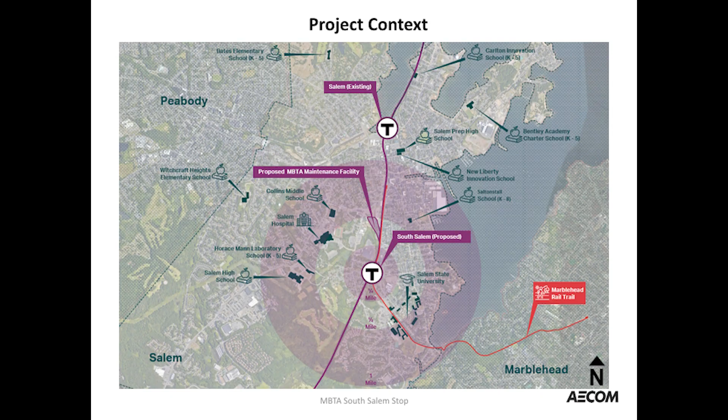Getting into the site constraints as to why the station is laid out where we're proposing, we have the Jefferson Ave Bridge going up and over the tracks to the south. We have the tunnel further north, as well as the existing MBTA rail yard adjacent to the Amazon facility. There are currently 3 tracks in this area: one is just a siding to access the yard, and then there's the 2 mainline tracks.

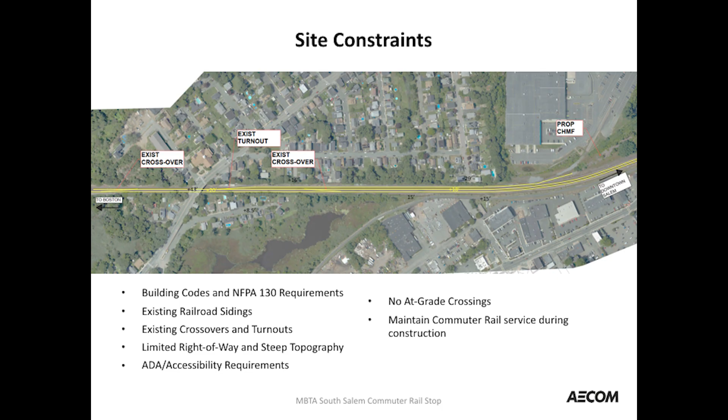So now to revisit what the initial concept was back in June.

The initial concept was to provide pedestrian access via a bridge directly at the end of Ocean Ave West and having 2 elevators for accessibility on each side. Two 600-foot long platforms on each side of the tracks for inbound and outbound access would be accessed from the bike path and from the pedestrian bridge up and over to each side of the platform.

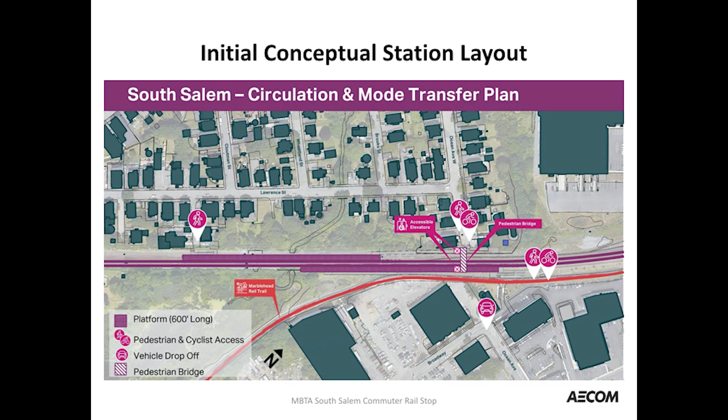Quick 3D view of what was proposed back in June. A view from Ocean Ave West of what was proposed in June.

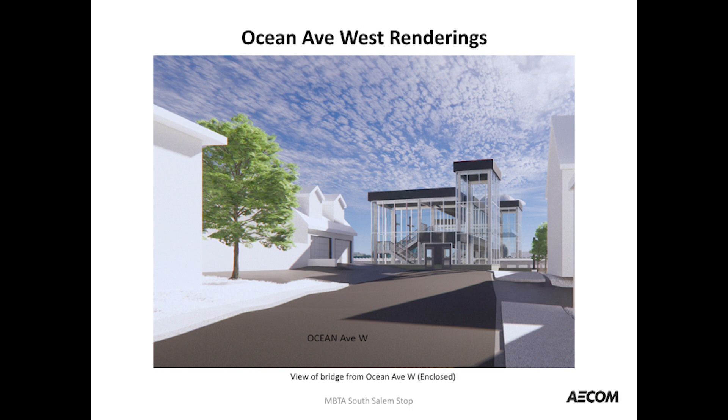Getting into the feedback that we received both in person and via the SurveyMonkey, a lot of the positive feedback that we received from over 100 survey responses was public transit improvements, environmental positives, reduction of traffic and vehicle emissions in the city, accessibility and connectivity of the neighborhoods, and easier access for students to Salem State.

The main concerns that we received from the public include vehicular access and traffic concerns along Ocean Ave West, pedestrian volumes on Ocean Ave West to access the station, noise and disruptions to the neighborhood from the station, parking along local streets, light pollution and visual impacts to those living on Ocean Ave West, and general safety concerns.

Now moving on to what the project team has been working on over the last few months to address the public's comments and feedback. The new updated baseline is shifting the bridge and major infrastructure further north, away from the end of Ocean Ave West and the direct view of the neighborhood.

It's the same distance to walk. There's just a switchback that has been eliminated from the ramp, so accessibility and distance for someone to travel up and over the tracks remains the same.

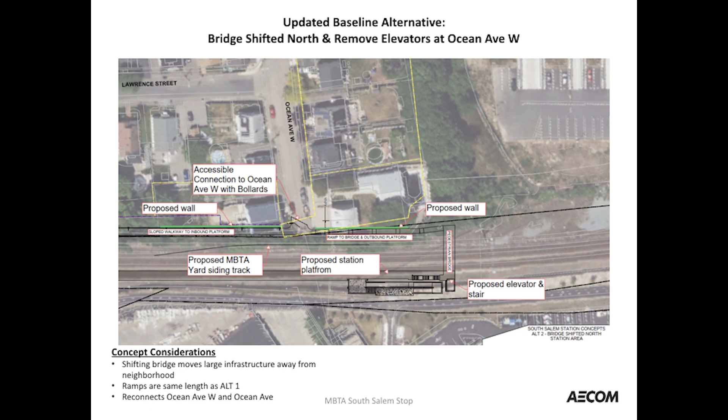As was noted, elevators are being removed from the western side of the station. It would just be a ramp, and the bridge would now be behind the Ocean Ave West neighborhood. Everything on the bike path and Canal Street side mostly remains the same, with the bridge shifted north and an elevator and stair system proposed to get accessibly down to the bike path elevation.

Here's a 3D rendering of what the concept would look like for the new baseline alternative with the bridge shifted north. Here you can see ramp and stairs covered by a roof, as well as the pedestrian bridge elevator structure to the right, and your platform canopy, both 600 feet long on each side of the tracks.

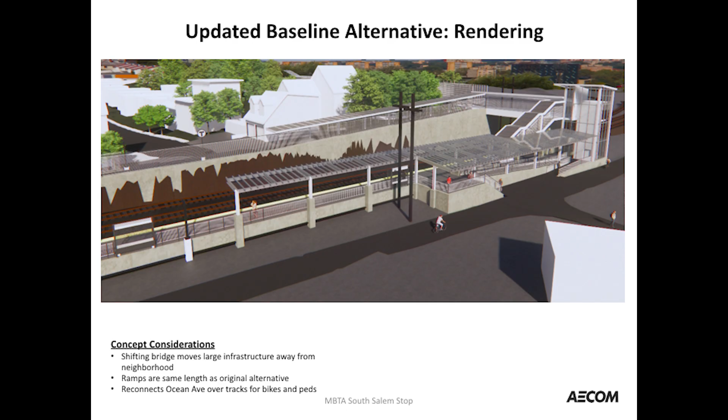Here's an updated rendering view of what it would look like from the Ocean Ave West neighborhood. Here you see the tall railing fence where the existing retaining wall is to protect users, and then there's going to be 2 ramps on either side with the MBTA lollipop sign to access the station.

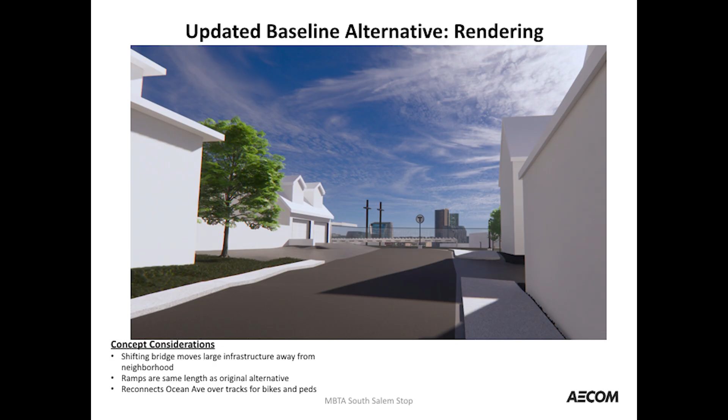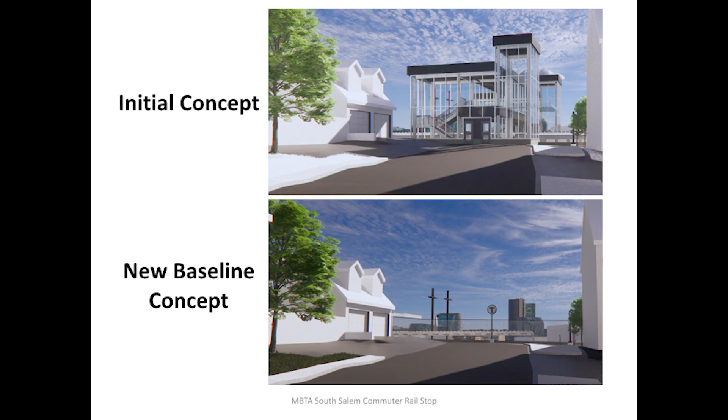Now, in addition to what we have done with the initial baseline concept, we've taken the feedback from the public a little bit further to see how we could possibly mitigate the impacts to the adjacent neighborhood of Ocean Ave West and Lawrence Street. With this, we thought about how we could completely mitigate the large traffic volumes, both by vehicles, bicycles, and pedestrians along Ocean Ave West.

The thinking of this new alternative is having an alternative access point along the Amazon site, getting to Jefferson Ave via 193 Jefferson Ave. This would be a 14-foot wide path, similar to the existing Salem bike path and other rail trails in the state. It would have lighting, security, trash receptacles, and signage, and could essentially be considered a spur or continuation of the existing Salem bike path.

Here's a zoomed in look at the station area with this additional access. Everything remains the same - we have walls and ramps along the Ocean Ave West side of things. And now at the pedestrian bridge, we have the spur, which is going to continue west up towards Jefferson Ave.

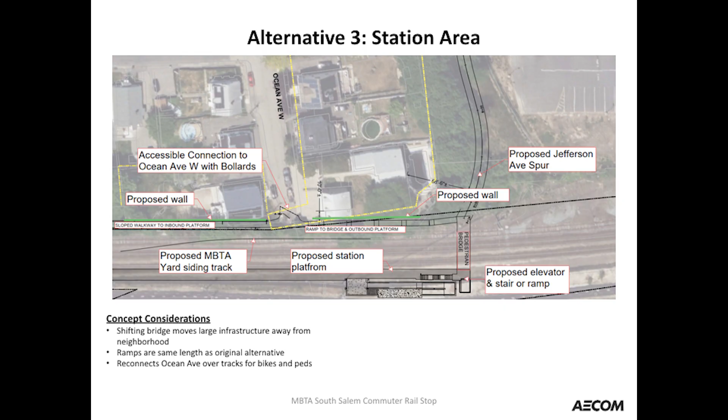Sorry, can I just ask a question - do you have people still coming out on Ocean Ave West, or is there a proposal to bring them north and out by Hampton? Why don't we take questions at the end - we'll address that one if we haven't covered it in the following slides. We'll get to it in the Q&A. Thank you. All right, thank you.

So here's a 3D view of what this would look like from a slightly different angle with the Jefferson Ave spur. You can see both the staggered platforms, the covered ramps, covered stairs, and pedestrian bridge.

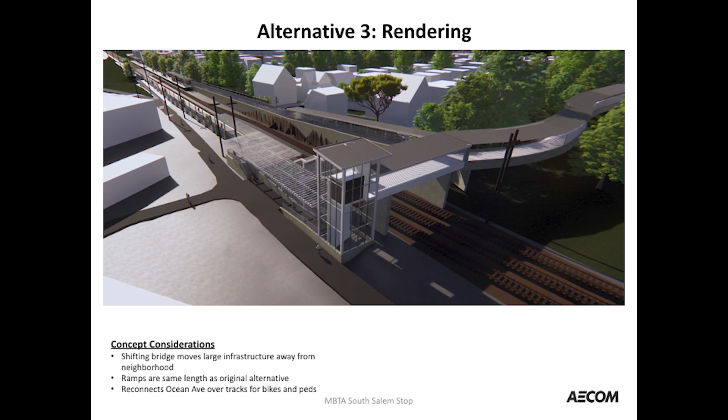Some two critical cross sections to take a look at what we're working with in elevations in this area. At the top of the page, we are about halfway along this Jefferson Ave spur path. To the left in blue is the existing Amazon warehouse building, and to the right is the existing residence property line. As you can tell, that is up in elevation and the path is starting down in the trench.

That will slowly ramp up to the pedestrian bridge, which is now at the bottom of the page, closer to the pedestrian bridge, where we're about even with the backyard elevation of the Ocean Ave West properties. But we are proposing a privacy screening and canopy along the residential side of the path.

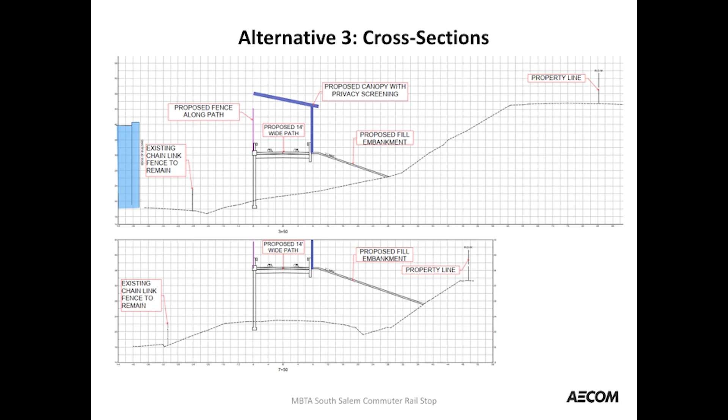Another critical area of this design concept is how do we connect at the end of Jefferson Ave to the city streets and sidewalk. In order to make this fully accessible, there needs to be a ramp, shown in green on the screen, from the existing parking lot elevation. For those familiar, there's a very steep driveway there, so a new ramp system will need to be designed to make it accessible into the sidewalk.

Working with, and thanks to Beth, we've been able to coordinate with the private property owners. They're all willing to work with us, they have their own plans, and we feel comfortable that all parties can get what they want and have a good design moving forward.

At this moment in time, we're proposing for this concept to have a small pickup drop-off island in the back of this parking lot. This could be utilized by private vehicular traffic to pick up and drop off any users at the end of the path, and also for the hospital shuttles, which are currently going around Salem streets to come in and pick up and drop off users for the hospital.

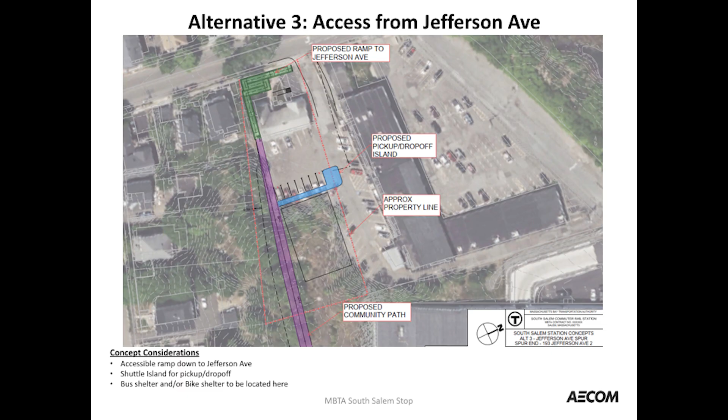Here's a different angle looking west towards the neighborhood and the path, with ramps there and an elevator.

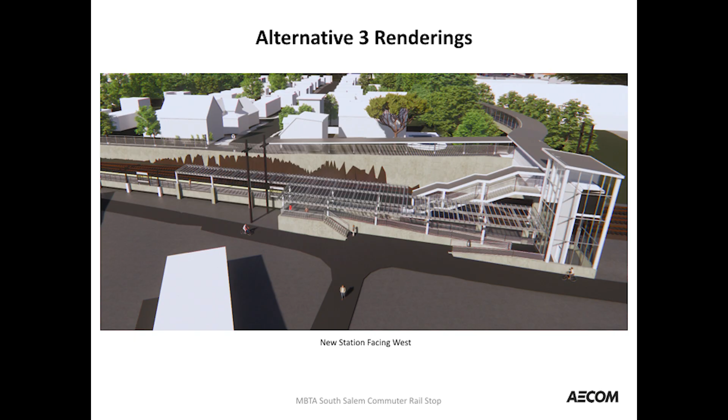Here's a nighttime view of the alternative. This would be the same for the baseline, just without the spur - same lighting for security and visual purposes. With the canopies and walls proposed, this would help mitigate any light pollution spilling into the end of the Ocean Ave West neighborhood.

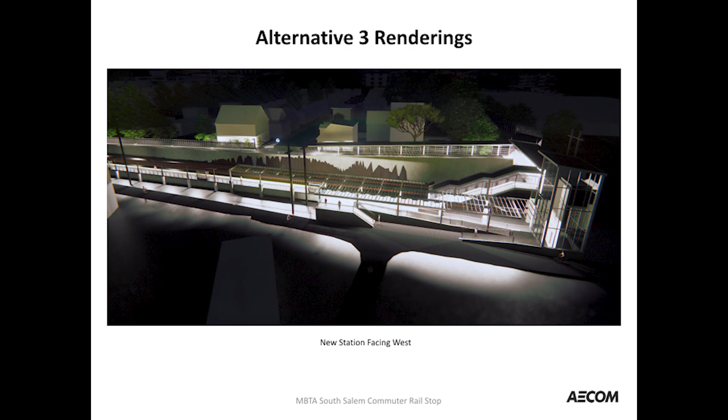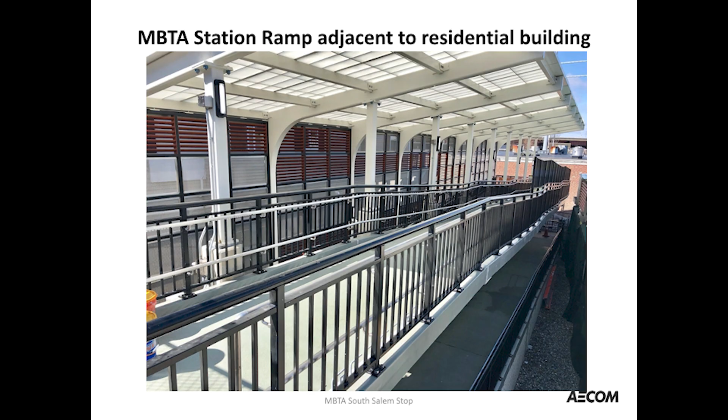Here's another real life example of what is used when building ramp and platform structures directly adjacent to residential neighborhoods. Here's a ramp system accessing an MBTA station, mostly covered canopy, one side wall with screening, both with partially translucent panels and aluminum fins. There's an existing residential building about 8 feet away from the back of that wall, and this wall still allows natural light to both sides, for the users on the ramp and the residential building, but it also provides privacy and protects the residential unit from people looking up into their windows.

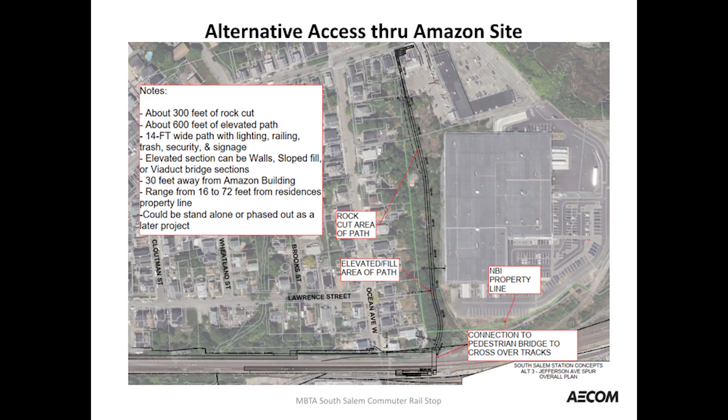I guess we're trying to figure out if that proposed area where they go down Jefferson Ave, is going to be placed, putting them out on Ocean Ave West, because I see no reason why there would need to be access on both sides. The access to Ocean Ave West is required by code regardless, and the idea is to provide access to the neighborhood to get up and over the tracks regardless. This is a neighborhood station, and neighborhood access to the station is— But the neighborhood doesn't want it. We're gonna take one question at a time, okay?

If you have a question, I'll come to you. Thank you, I'm sorry, can I just have one follow-up question? You mentioned you have walls or some sort of barriers. Does that go all the way down the platform, or is that just in the area of Ocean Ave West? Those walls are currently proposed at Ocean Ave West, directly adjacent to the residence buildings.

I have concerns about safety for the rest of the neighborhood on Lawrence Street because of the current inadequate fencing that's there. There will be fencing provided—walls only along Ocean Ave West, but fencing behind the entire platform, yes. I would like to see walls going all the way down the entire platform, because I think it would be safer, not only for residents, but keeping people from going over. Right now I live across from the access road, and I see people cut through here all the time.